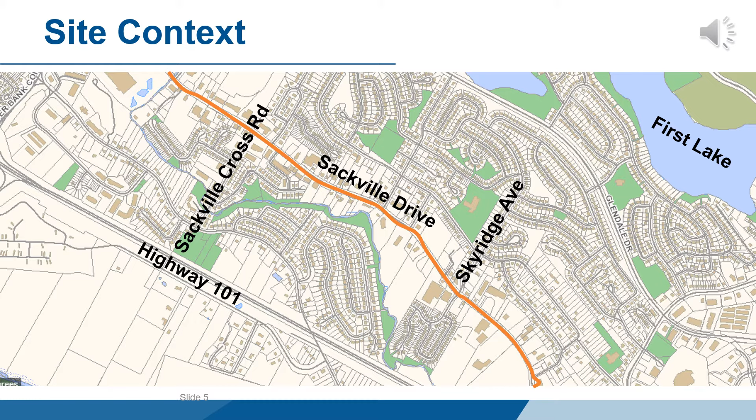Site context: Sackville Drive is the main road in Sackville, joining Middle Sackville with Highway 101. The area has a mix of uses, with many commercial uses, recreation and institutional uses, multi-unit residential developments, and serves as an access to many low-density residential developments. Sackville Drive runs parallel to Highway 101, and areas to the north of Sackville Drive are higher in elevation than the lower-lying lands to the south of Sackville Drive.

The area in orange identifies the properties within the Sackville Drive plan area, which would be directly impacted by any land use bylaw amendments. The area in pink identifies properties within the Sackville plan area.

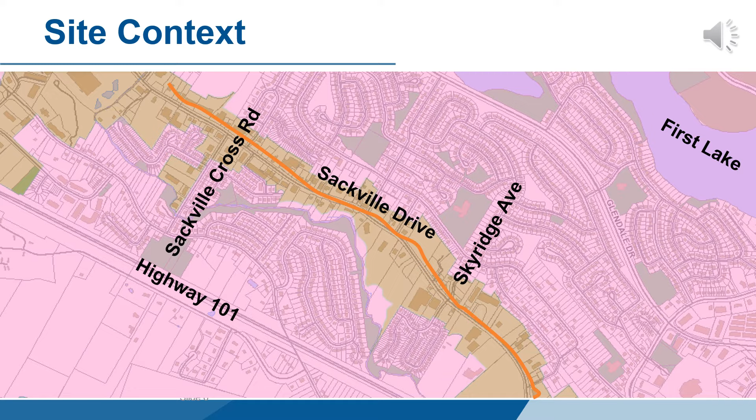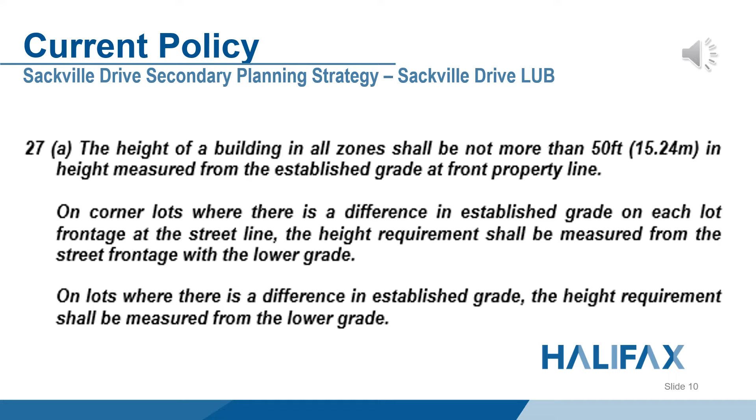A development agreement is a legal contract between a developer and the municipality and governs what can be built on a property. To get a development agreement, a property owner must apply for a planning application and demonstrate how their proposal meets policy. The application is decided on by council. On the slide, you'll see the policy as it was approved then and exists today.

There are a number of other regulations in the Sackville Drive land use bylaw for buildings, such as building setbacks from property lines and lot coverage maximums. Each zone within the Sackville Drive secondary plan area has its own specific set of requirements for buildings.

There are a few commercial zones that do not allow residential uses, which have yard setbacks that go as low as 0. However, 60 feet setbacks from rear and side yard that abut residential uses are required. In these zones, lot coverage maximums range from 50 to 80%.

There are other zones that allow both commercial and residential uses, including multiple unit dwellings. These zones require side and rear setbacks ranging from 16 feet to half the height of the proposed building. In these zones, lot coverage maximums are 50%. None of these regulations in the land use bylaw are proposed to change with this application.

Staff have chosen 3 sites within the Sackville Drive secondary plan strategy area that have been granted building permits in the last 5 years as examples to help visually represent the existing policy in action. 2 of these sites are located on the higher side of Sackville Drive, and 1 is located on the lower side. Each of these buildings were constructed to roughly 5 stories under the current policy, without creating building incompatibilities from the north to south sides of the street or causing detriment to lower density residential developments. These policies demonstrate the achievement of uniformity of building height from one side to another of Sackville Drive.

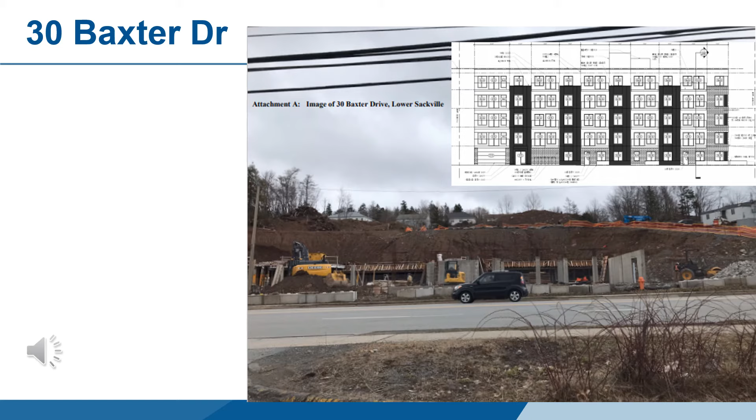Northwest Community Council is proposing to change how height is measured in Section 27A of the Sackville Drive land use bylaw. In doing this, building heights for all buildings in all zones across the plan area would be measured by an average of the established grade of the lot and no longer from the front property line.

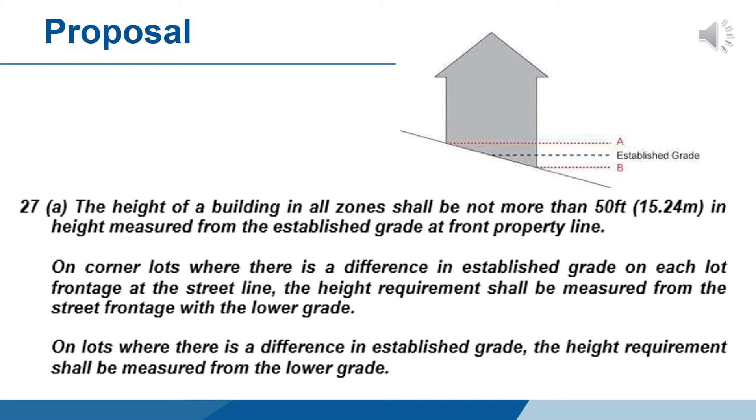The HRM Mapping Department created visuals of what this change could look like if approved. We chose random vacant properties along Sackville Drive to illustrate what could be built if this change is approved, selecting properties on the higher side of Sackville Drive and one on the lower side. Keep in mind that depending on the slopes of the properties, the height results could vary, and this policy applies to and impacts all properties within the Sackville Drive plan area, not just those in the following illustrations. These are simply random examples.

This view is looking to the northwest. The image on the left illustrates the building form that could be built under the current land use bylaw regulations on the properties shown in green. Building height on this site would allow 1 to 3 stories under the current land use bylaw regulations on the higher side of Sackville Drive. On the lower side, building height could be built at around 4 to 5 stories.

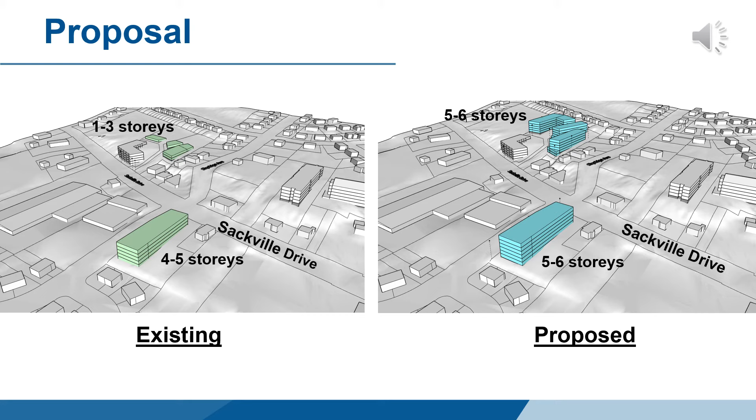The image on the right illustrates what could be built if the height measurement wording was changed in the land use bylaw. The same site on the higher side of Sackville Drive could be built at 5 to 6 stories. On the lower side, building height could be built again to 5 to 6 stories.

This view is looking northeast, showing the existing built form permitted and the proposed.

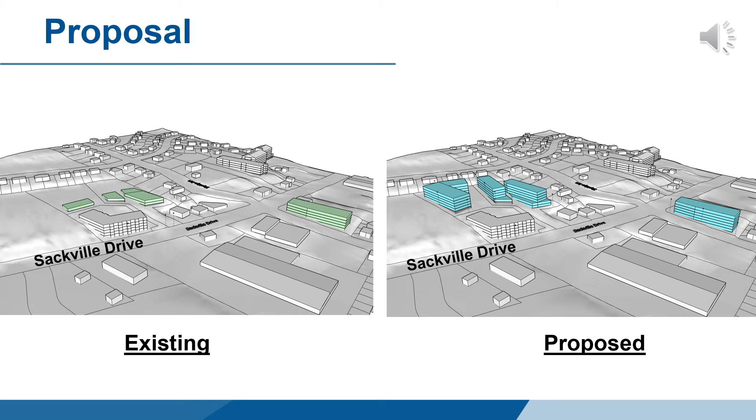This view demonstrates the view from the lower side of Sackville Drive. You can see that the existing policy creates a box-like effect, resulting in buildings on the higher slopes being at the same vertical height as those on the road. This results in uniform building heights along Sackville Drive. The proposed policy would allow buildings to be higher than those fronting Sackville Drive for properties with higher slope and elevations.

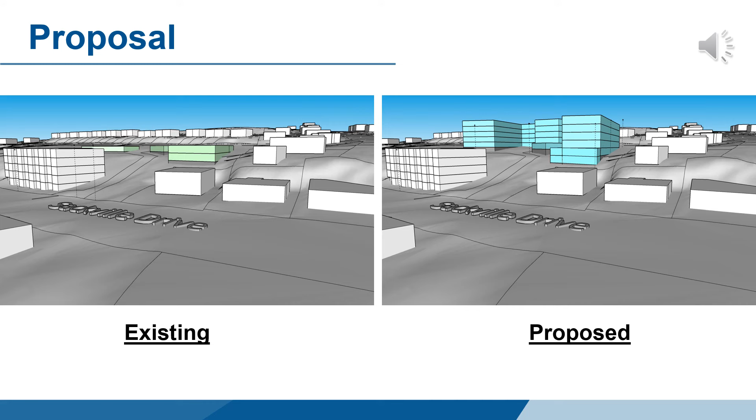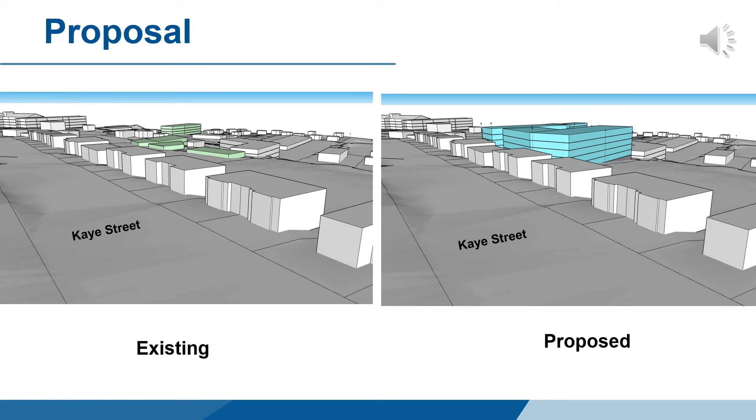These images are all depictions of what the change in height definition could look like. Modeling illustrates that buildings at higher elevations with slopes would enable higher building heights and more density on the sites. For buildings at lower elevations with slopes, modeling illustrates less increase in height allowance. However, there may be other sites in the plan area that are at lower sloped elevations than those shown in illustrations, which may have more exaggerated results, for example, more or even reduced height allowances than permitted under current policy.

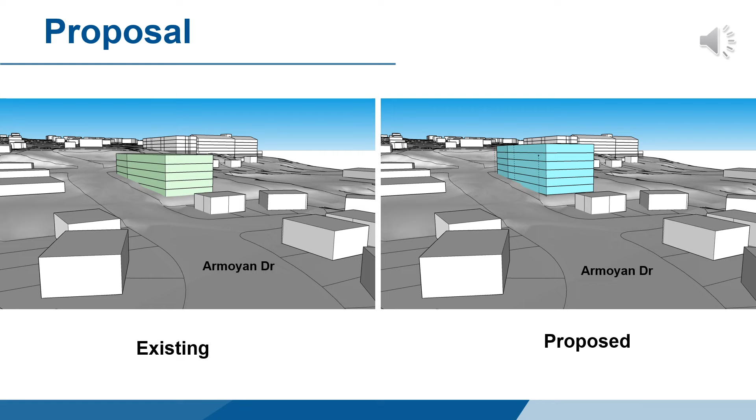The application will then be presented to Northwest Community Council for first reading. If Council decides that they want to consider this application, a public hearing will be held, where members of the public are invited to share their thoughts on the proposal. Council will then make a decision about whether to approve the application. Once their decision is made, there is a 14-day appeal period.

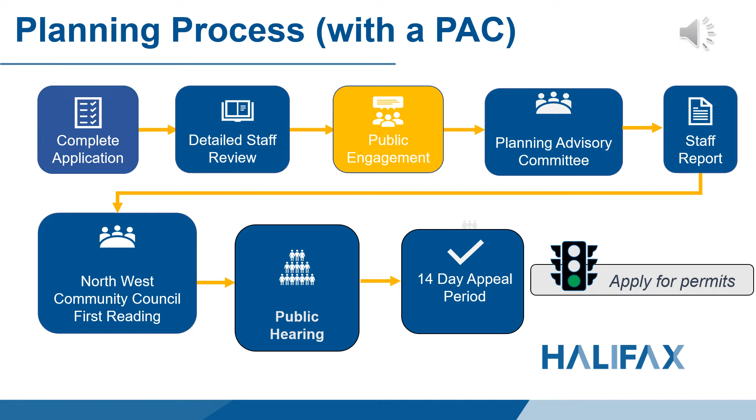I encourage you to share your thoughts and ask questions about this proposal. Are you in support or opposed to this proposal, and why? Comments and questions can be emailed to Paul Sampson at sampsop@halifax.ca, or you can call him directly at 902-717-8125. And that concludes the presentation today. Thanks for listening.